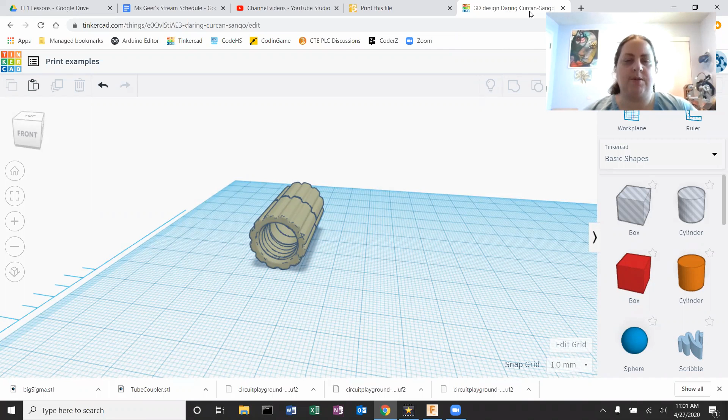We're going to talk today about how to export a file to get it ready for 3D printing from either TinkerCAD or Fusion 360. And there's a couple of different things I want you to keep in mind when you're getting a file ready to submit. So the first is that if you look on our print this file turn-in place on Canvas, I listed the build dimensions of the printer that we'll be using. It's a FlashForge Creator Pro. And that's its dimensions in millimeters. So you can't send me anything that won't fit in that space or I won't be able to print it.

The things that I want you to keep in mind when you're getting a file ready to export are it should be the correct size. So you should send it the size you want it printed. I'm not going to rescale it for you because I don't know what you want. You need to size it correctly before you export it. Second, oriented the way you want it. I'm going to talk about that, which way it's pointing.

And then not have sections that are too small to print, so too thin. For example, the filament that comes out of the machine can only get so narrow. If you have a part that's really, really tiny, it's possible the 3D printer software won't even see that there's supposed to be something there because it's too narrow. So I'll look at all of those examples.

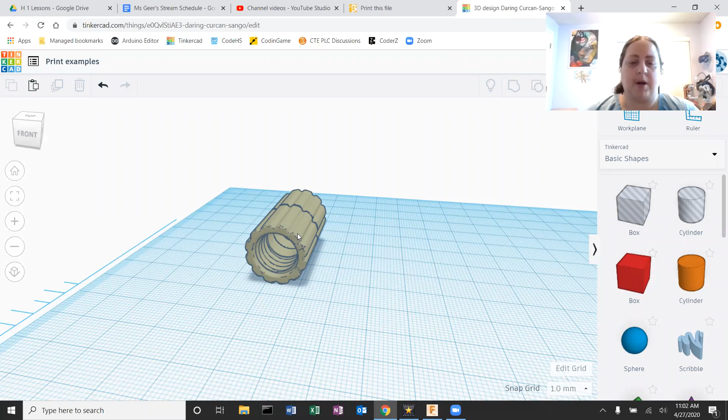First, we'll look at TinkerCAD. So here is a part. It is a coupler part. It's made for attaching a large tube of toothpaste to a tiny tube of toothpaste so you can refill your travel size containers. But here are the few things that I want you to think about. What way should I print this? Should I print it like this?

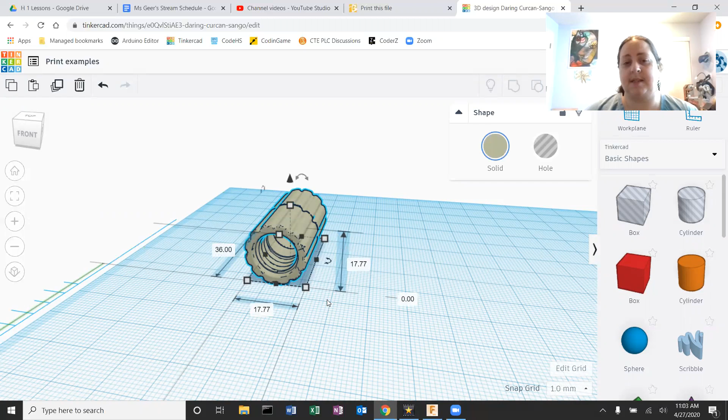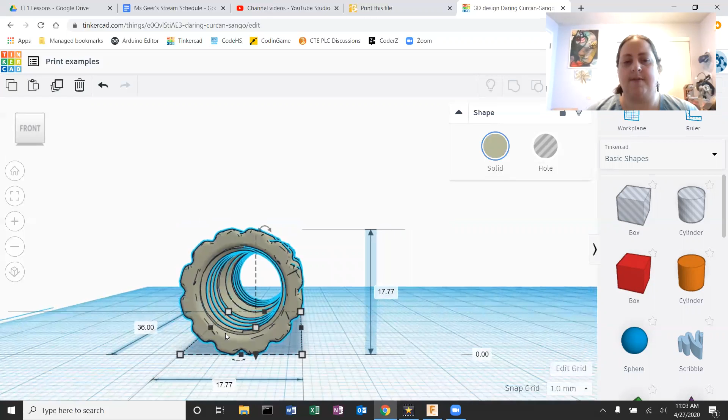If I do print it like this, it's going to fill in the whole center here with support material. And it's going to be really hard to get all that support material out cleanly and smooth out the screw ridges there enough to actually let it work. And it's also just kind of a waste. So instead, I would look at this part and say, you know what? I think that there is a better way to go.

I bet if I click and I hover over the rotate and I rotate it 90 degrees, now the printer will start down here and work its way up, but it won't fill this entire center section with support material because it won't need it.

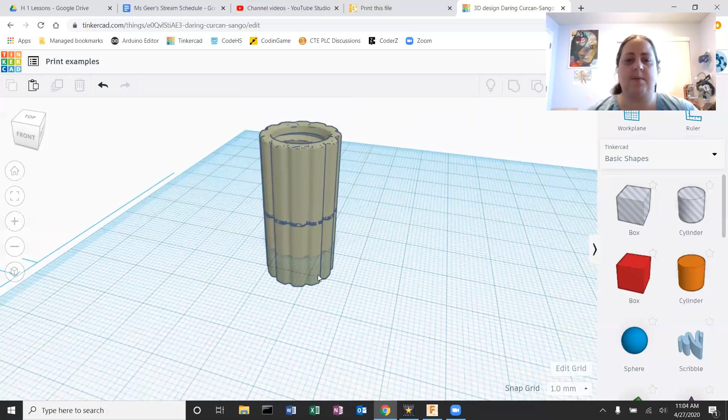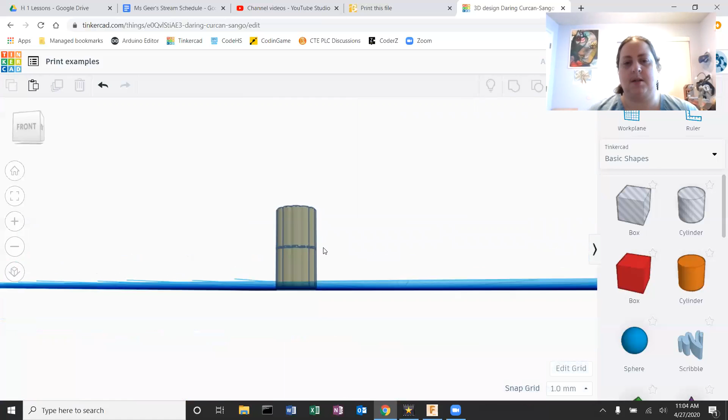Okay, so the second thing to think about here is now this is not on the platform. You can see that it kind of sticks through the platform, and that's not great. So we would click on this. TinkerCAD has a nice little shortcut for this one. If you just press the letter D, it will drop it to the surface. Ta-da, just like that.

Okay, so now this part is at least oriented correctly. I don't see any sections that are too small to print or too thin, so it is ready to export, assuming it's the size we want it, and in this case it is. So if that's the case, we would come over to export over here. Export, download, and 3D print is what it says when you hover over it. So if you click there,

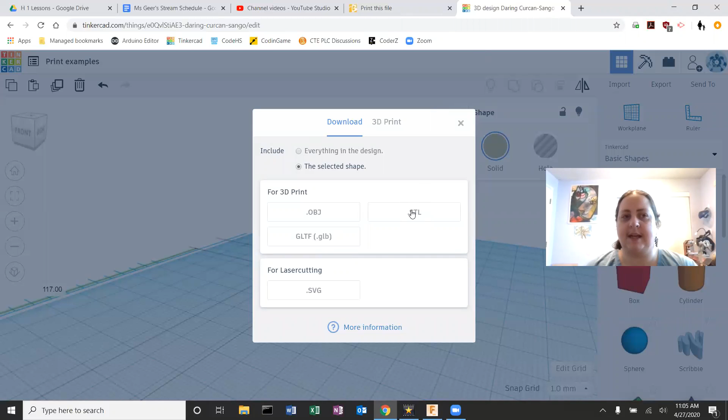you can choose either everything in the whole design or just the selected shape. In this case, I just want the selected shape. I just want that coupling piece. And then STL is the type of file, and it says that in the print this file section to STL file. So if I click STL file, it will download over here in just a moment.

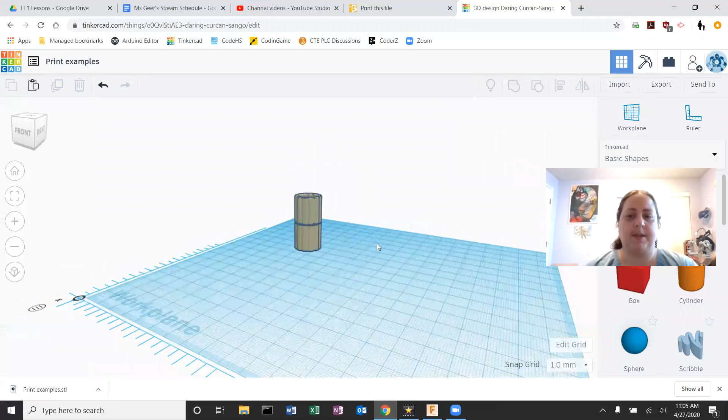It's preparing. So it will download a file that has the ending, there it is, .stl, and that is the file that I want you to submit to print this file so I can get it printed. And I'll take pictures and send it back to you. And then those will be available for pickup when school reopens. Okay, so that one was pretty straightforward.

Let's look at maybe one that isn't as straightforward. So last week, I looked at designing a cookie cutter. I didn't design this one. I went and borrowed this one online just so I could show you this print export stuff. So right now, it is really big. I pulled out the ruler so that we can see it's really big. It's 282 millimeters by 219 millimeters. That's way too big. That's bigger even than my whole print bed.

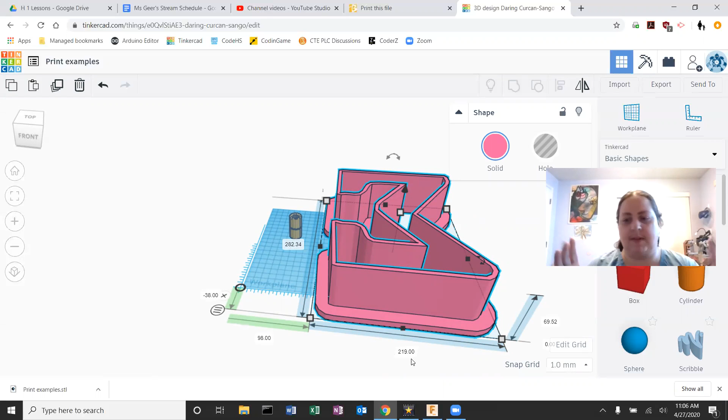But it is easier sometimes to be able to visualize that. So I want to show you a really good way in TinkerCAD to visualize your build space. If we go down here to Edit Grid, you can actually set the dimensions of your grid right here. So if I know that 225 is the width dimension, and I think it was 145, is that true? Yeah, is the length dimension.

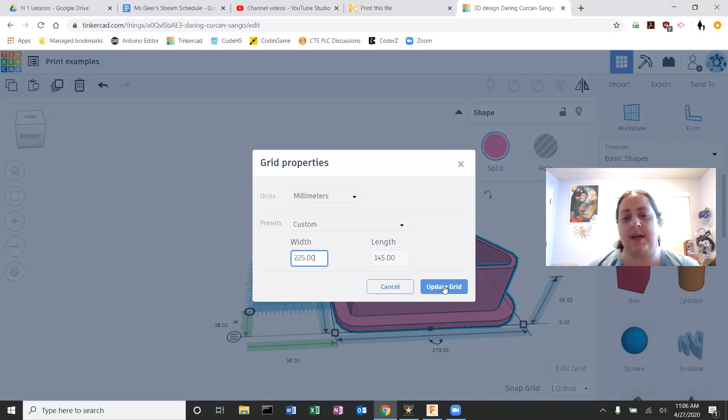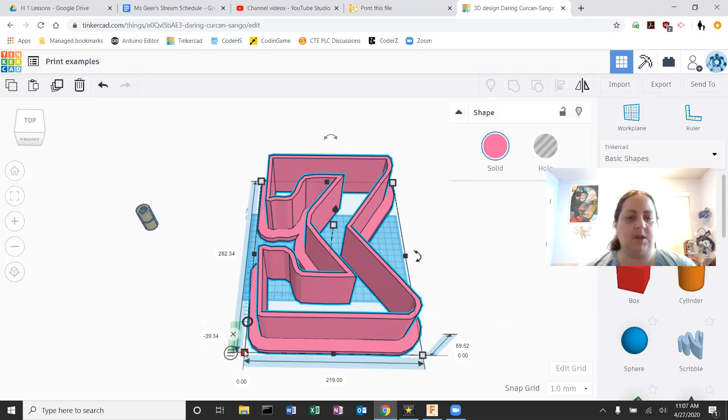Now when I say update grid, I'll move this out of the way, that is the build space that I have to work in. I'm gonna move this coupler out of the way. Okay, so now this guy, clearly too big for my build space. So I want to make it small enough so that it can print correctly. So I am going to shrink it down to size. If I hold Shift, then when I go to shrink, it will shift in proportion.

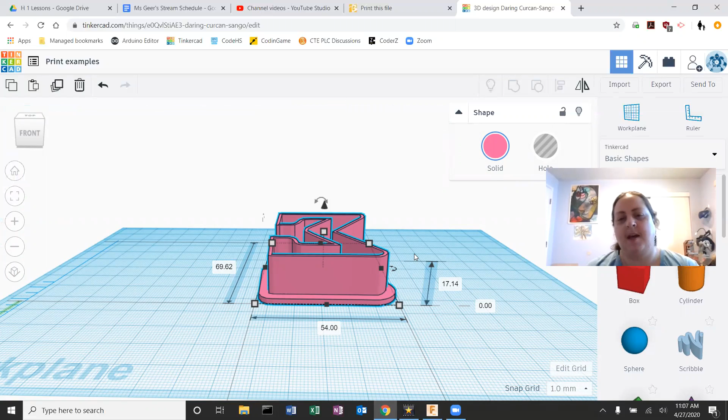All right, that's looking a lot better. If we look, 54 millimeters this way, 69 this way, and 17 this way. It's pretty close to right. The other thing that I want to check is these walls. You see these walls? I want to make sure they're not too thin.

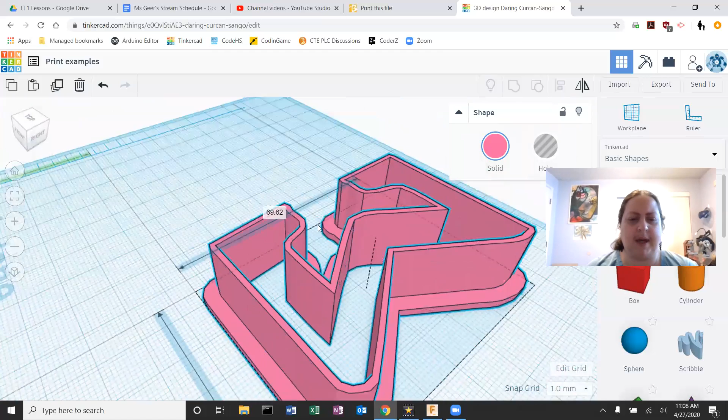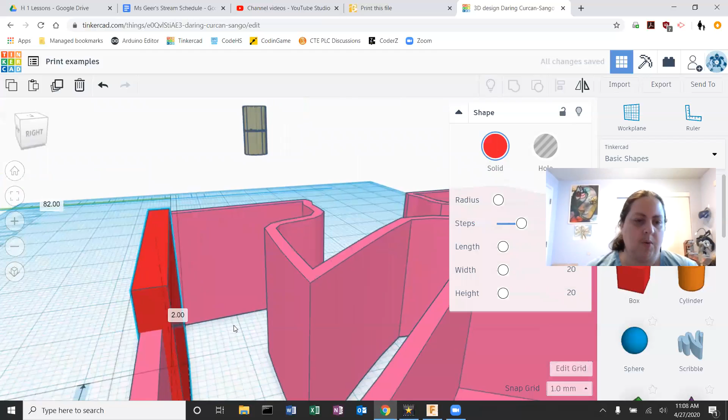And there's a couple of ways to do that depending on what software we're in. Here I can just kind of eyeball and look, and it looks to me like those are maybe 2 millimeters thick based on the grid behind them. But one good way to check is going to be to bring out a box, and I'm going to make it 2 millimeters thick. And now if I compare these, okay, so it looks like my wall currently is more like 1.5, which is a little thin for a 3D printer to pull off well.

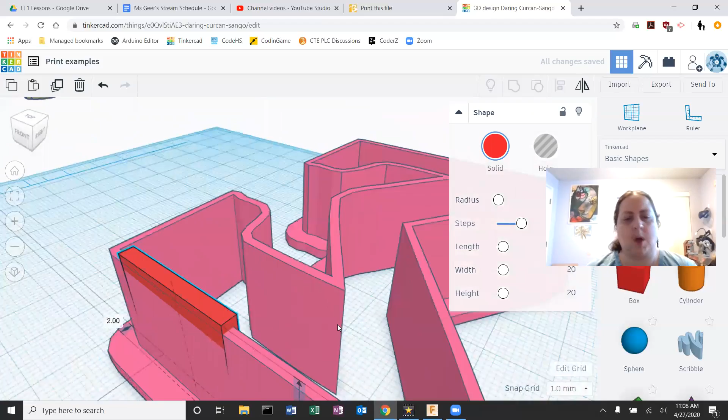So maybe I will make this a little bit bigger again and then see how we're looking. A little closer. This would be close enough that I would at least try and print it, especially because these walls are supposed to be really thin in order to cut through that cookie dough well.

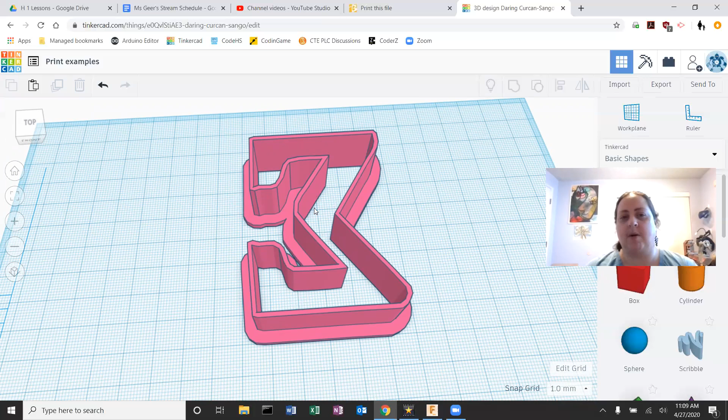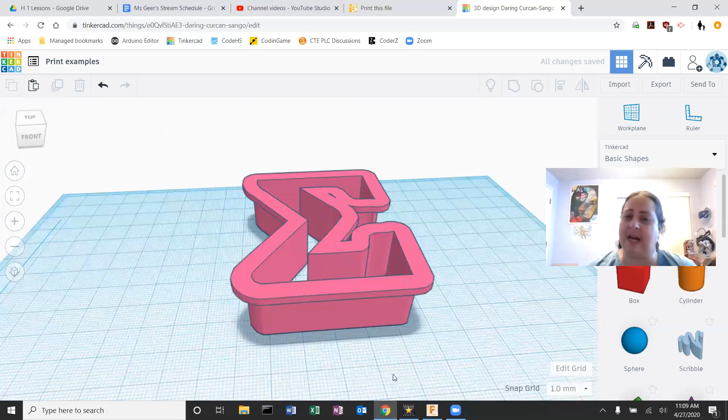So if this was ready, the other things that I want to think about are how it should print. It happens that this is a pretty good way to print it. It's going to have that flat grip base on the bottom and then the walls that go up from there. So if I had designed it instead like this, and I was getting ready to print, everywhere under this ridge would require support material. That would be a lot of support material, and I would not want to try and print it that way. So I would expect that you would flip it over and send it to me in this orientation.

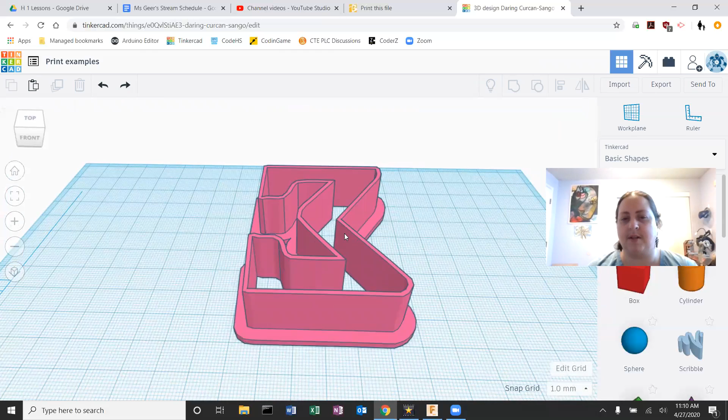Okay, so once again, if I am ready, I'm going to click Export. I do not want everything in the design. Oh, but I forgot to click on it first. Okay, so this is all I want to export. And I just want the selected shape, and I'll hit STL, and it will download that to my computer.

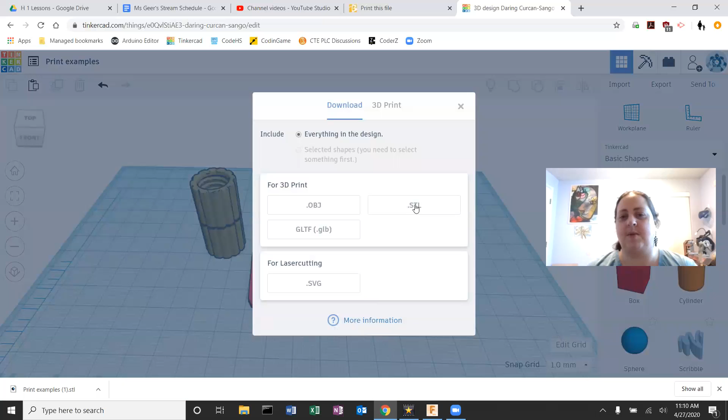If you do have a print file that you need more than one thing printed, this would not be a good example. I would like to print these separately, but if you had a thing that you needed more than one thing to print, we would just not click on anything, go to export, and say everything in the design. So now when I export this, it's going to take both shapes together.

You do need to make sure that they have a little bit of space in between them, but we would not want to space them out like this. This will just make your whole print take longer and is not ideal. In general, it's fine to send me multiple files and say that you need both printed, but not pre-combine them yourself, because that just means I can arrange them in the print bed as best I can. And so in general, I would prefer that you send one item per file.

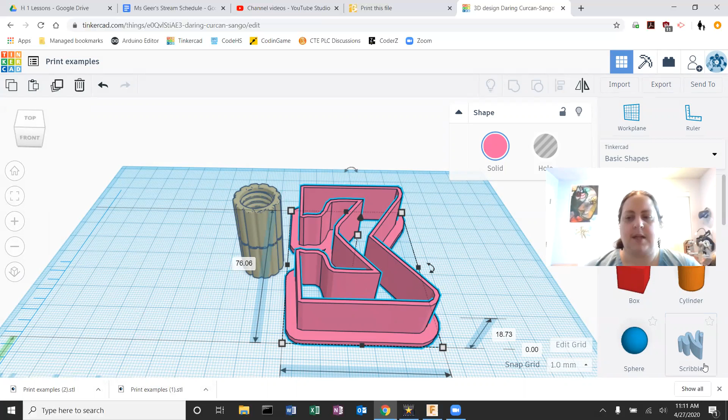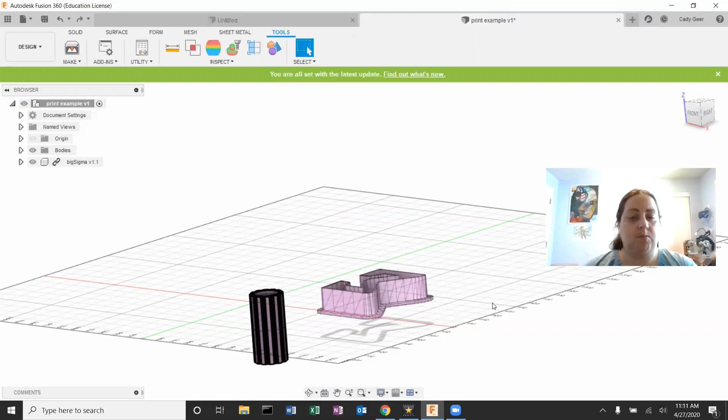Okay, so now I've got some downloads. That's great. Those are looking pretty good. Let's go look at a similar set of steps in Fusion 360. So I brought in the same two objects to Fusion 360 for us to take a look at. Okay, there we go. And let's see, maybe I will move these guys around a little bit. You can do the same kind of rotating and resizing that we already know how to do in Fusion. Refer back to those how-to videos if you don't remember.

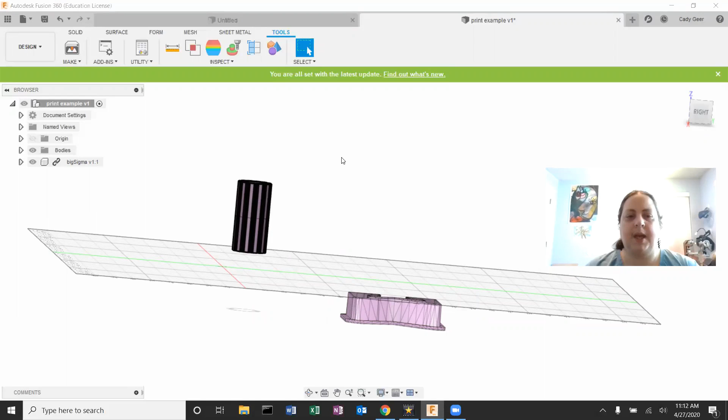But the exporting is the part that I want to be able to show you. So for example, if this is the piece that I would like to export, I will go and select it. It is all one body. Go down to bodies, one body. And I will go to tools. Usually we start on solid. I will go up to tools, over to make, 3D print.

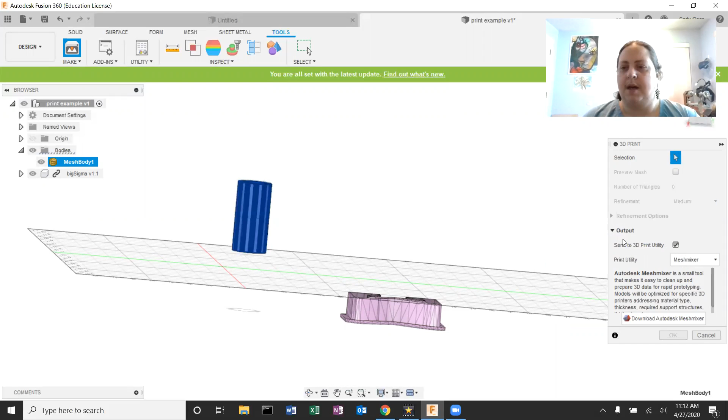So that brings up this little 3D print pop-up over here. The selection is going to be this part. You can see it turns blue. It says that it is selected, just like other commands. Under output, I'm going to uncheck send to 3D print utility because I just want an STL file. I'm not going to do my printing straight from Fusion.

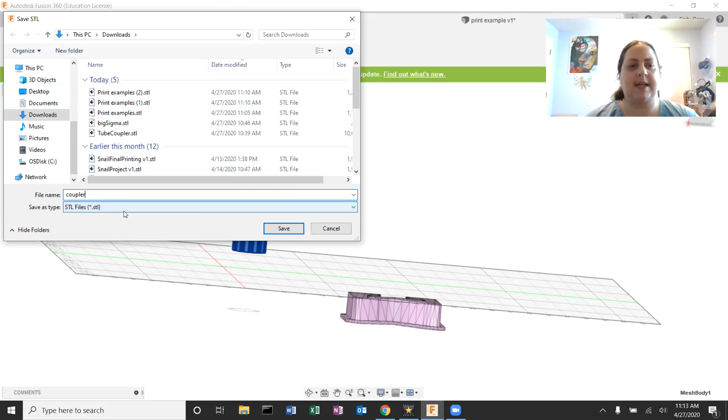And then if you say OK, it will bring up a place to save it. So this thing was a coupler. It's going to save it as an STL file and save. Okay, and that is the file that you can turn into the print this file assignment.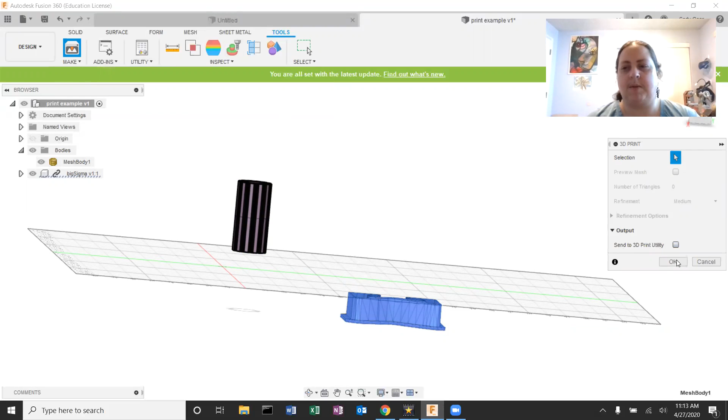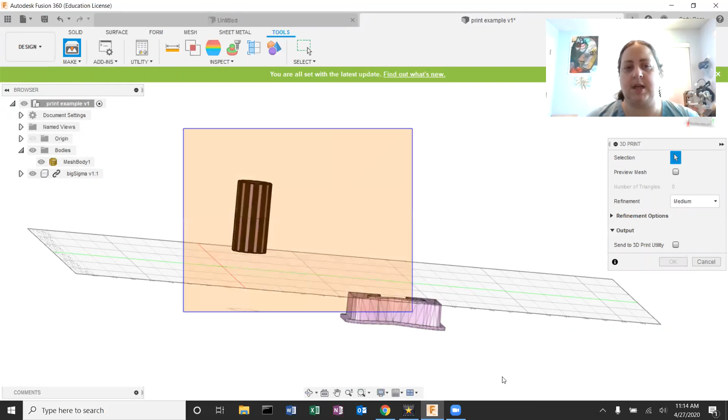Similarly, you could do it for this one: Tools, Make, 3D Print, have that one selected, don't send to 3D print utility, say OK. This one is a cookie cutter, save, and that one's saved. What doesn't work is to hit Make and 3D Print and try and do two things at once. It's not going to let you. It will pick one or the other, but not both.

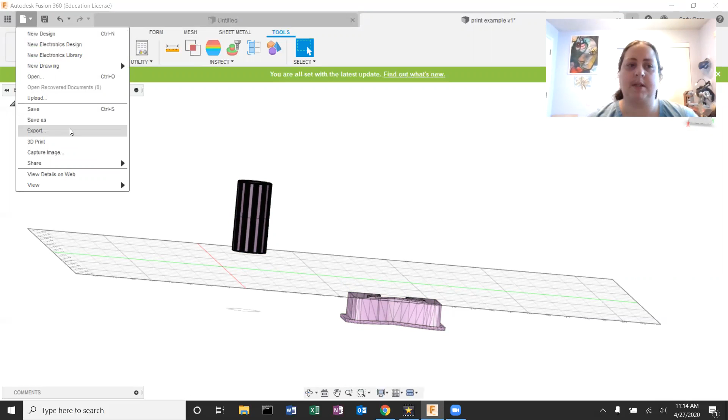So if you do have a thing where you need to export multiple bodies into one file, and this might be because you have assembled them but you haven't joined them completely, in this case that's okay. So how we do that is you go up to the File menu, down to Export, and here under Type, STL file is all the way down at the bottom.

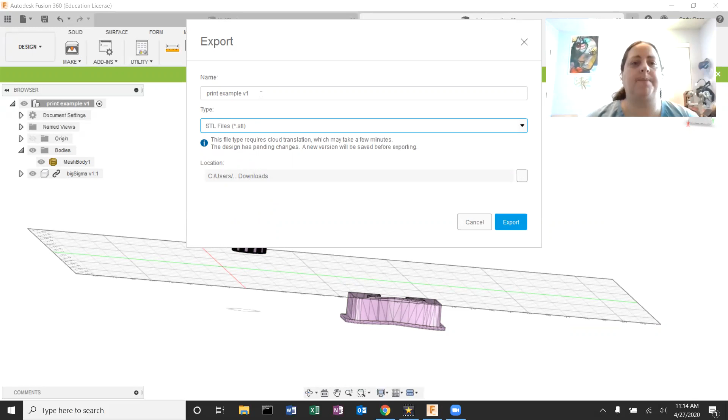Now this will take everything in your design and collapse it into one STL file, one print file. So make sure that the only things that are in that file are things that you want printed. If you have leftover stray parts, make sure you get rid of those before you do this export. And then we say export. And that's it. I'm going to show how it looks in the printing software.

So the Fusion 360 export does take a little while. You'll get this job status window that pops up. That's because Fusion is handling it via the cloud. So it's actually looking at your cloud file and doing the conversion there and then sending it back to you. So this one takes a little while, but it should be fine.

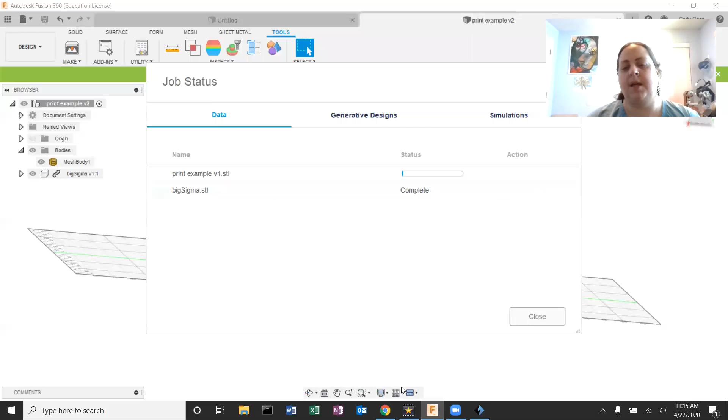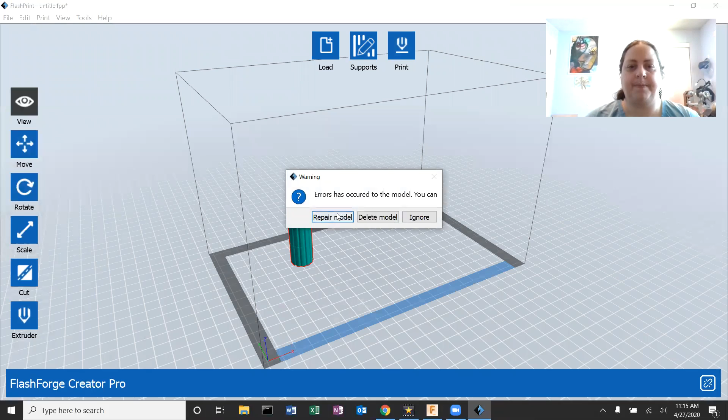All right, so we're going to take a look at FlashPrint, which is our printing software, and what I see when I'm getting a file ready to print. So this is our build area. If I hit Load, I can go find one of the files that we got ready, doesn't really matter which one. I'm going to say Open. And there is the coupler. So I can do things like move it around.

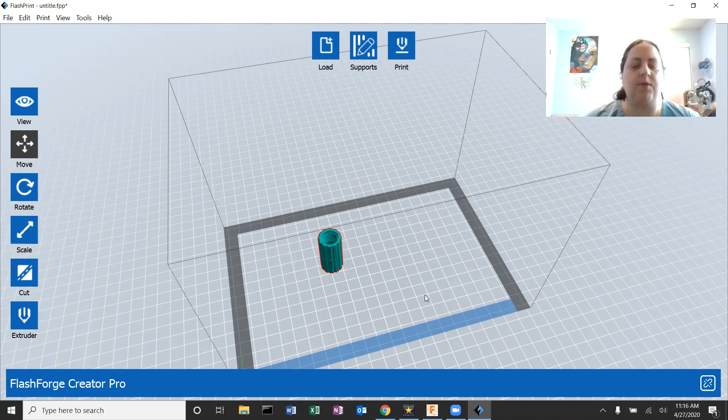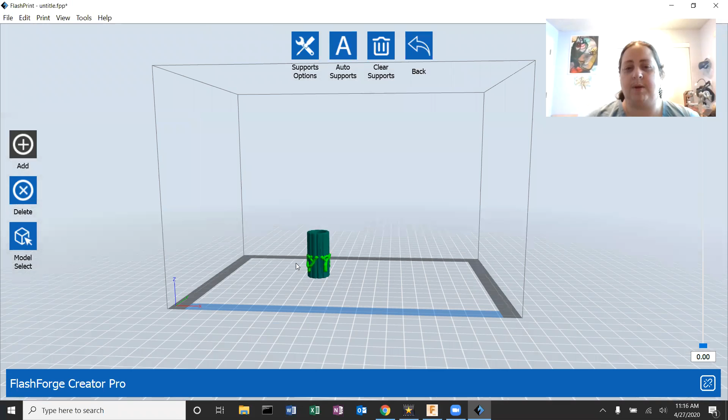I can rotate and scale in here, but I will not be doing that, because you are going to make sure that it is scaled appropriately and rotated correctly for the way you want it printed before you send me the file. Okay, and then if it needs support, I can do that in here. I can hit Supports and Auto Supports, or I can put in some particular ones if I think it doesn't put in enough. But this one won't need very many, which is good. That is the point. We would like to not waste more material than we need to.

And then when it's ready, I just hit Print, and I can change things like the speed and the temperature and the resolution. So if you want this to just be a test print, you can let me know that in your file upload, and I will print it on low. Standard is kind of our usual. If there's a particular reason you think it needs to be printed on high, you can let me know and I will take it under advisement.

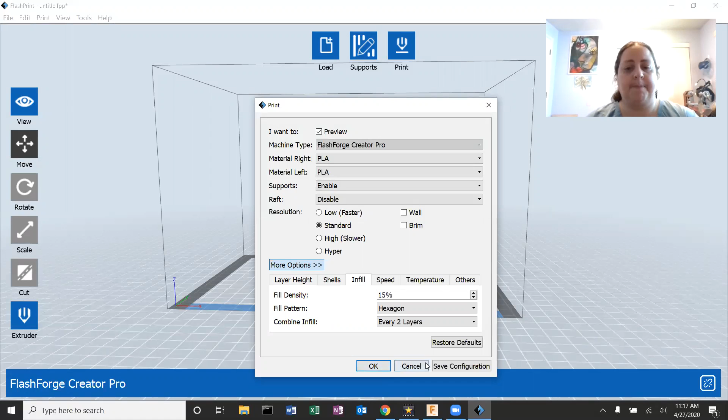Fill density too, by default we're at about 15%. If you want it hollow, so 0 infill, or you want it to be more dense for some reason, be sure to let me know before I print your file. So in that print file, put in comments about anything in particular you need, like the print resolution or the fill density. And that's about it. So I could take this one out. Let me show you what it looks like when we do 2 at once.

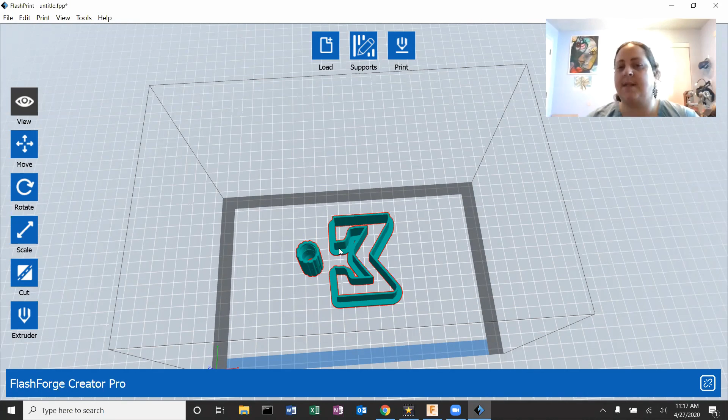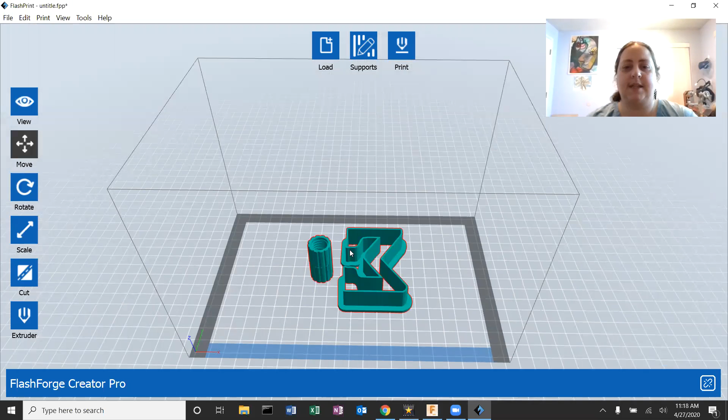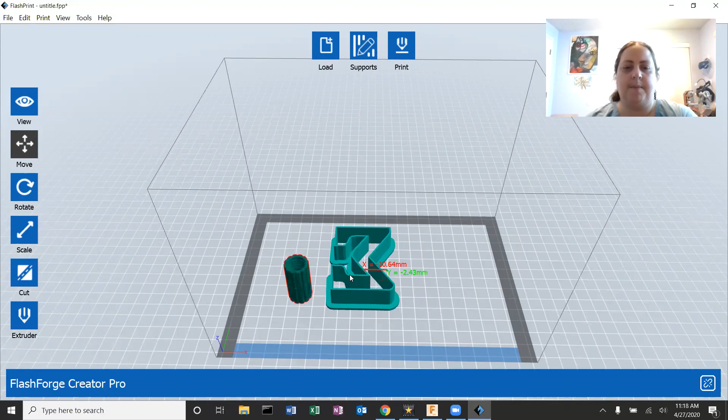So the good and the bad is that these are already set up to print together. But if I decide that I want to move this piece and not the other one, this file is not set up to do that. So in general, I would prefer that you send your pieces separately and I can assemble them in here like this instead. I can get rid of this one and I could bring in the coupler that we already had and the cookie cutter. And I could then treat these as separate objects. I can even still print them together, but I could rearrange them in whatever way made the most sense.

All right, I think that is our essentials for today. So we looked at how to export from Tinkercad and from Fusion 360 to get an STL file ready for printing. Keep an eye on how your object is oriented, so which part is down. Keep an eye on the correct sizing and make sure you don't have any walls that are too thin to print. And then that should be enough to get us started.

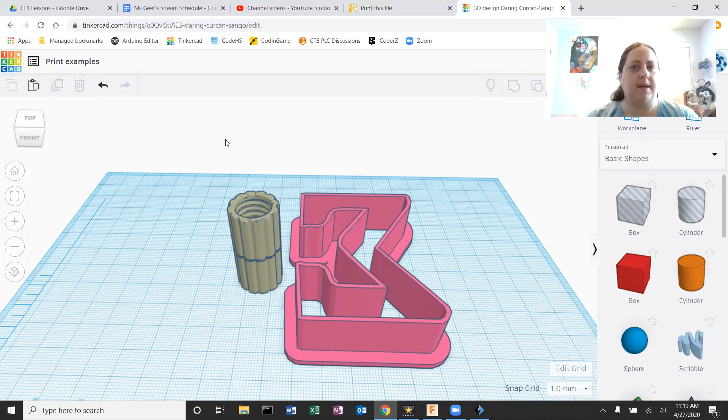When you have a file ready to print, you're going to go ahead and submit it here to print this file. Include in your comments those things like resolution, fill density, anything like that. Okay? And if you have questions, just let me know.